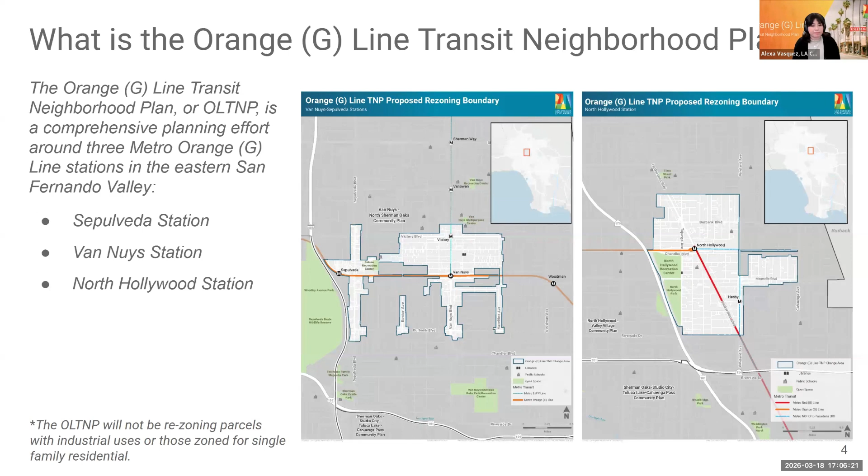The vision statement of the plan is to create thriving mixed-use districts that encourage sustainable living with multiple housing options and connections to neighborhood amenities and services.

Based on community feedback and topics that emerged during outreach efforts, the plan's goals include providing housing for all incomes, encouraging more community-serving businesses and amenities, promoting a variety of mobility options, implementing standards that support a safe public realm, and supporting healthy and sustainable neighborhoods.

The OLTNP will consist of the following project deliverables: updated land use maps around the Sepulveda, Van Nuys, and North Hollywood stations; updated zoning around these stations applying the city's new zoning code; mobility updates consisting of amendments to the city's mobility plan 2035 within the OLTNP plan area, including modifications to enhance transportation networks and street designations; and environmental review of the project in the form of an addendum to the city's housing element EIR, as the OLTNP serves to implement the housing element's housing production goals.

As of this public hearing, the project has now officially moved into the adopt phase, the final phase of the project. Following this, the plan will be reviewed by the City Planning Commission before moving on to City Council for adoption.

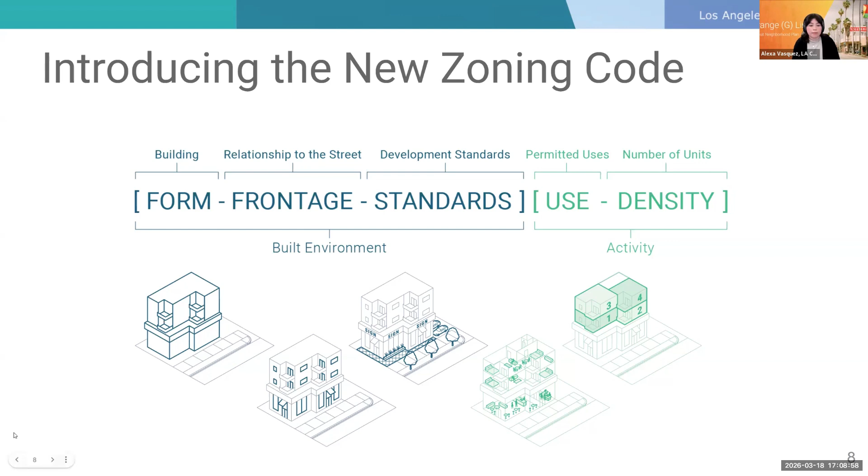Before we start our review of the proposed land use and zoning strategy for the OLTNP, we're going to provide a quick overview of the Citywide Housing Incentive Program, or CHIP, which has influenced the zoning strategy of the plan.

State law requires the city to update its housing element every 8 years and demonstrate sufficient zoned capacity for housing to accommodate the required number of units identified in the Regional Housing Needs Assessment, also known as RHNA. RHNA is a California state-required process that seeks to ensure cities and counties plan for enough housing to be built for Californians of all income levels.

In order to facilitate the construction of the required number of new housing units, the city adopted the Citywide Housing Incentive Program. The CHIP ordinance consists of 3 larger programs, each aimed at creating more housing. Of these programs, the Mixed Income Incentive Program, also known as MIP, has had the largest impact on the OLTNP zoning strategy.

MIP is comprised of 3 individual programs of the Citywide Housing Incentive Program, which was adopted in February 2025 and is active across the city. That also includes the OLTNP area.

The Opportunity Corridor Incentive Area Program incentivizes increased missing middle housing on major streets near public transit and higher opportunity areas. The Opportunity Corridor Transition Incentive Area promotes lower scale multifamily housing adjacent to major corridors in higher opportunity areas. And the Transit-Oriented Incentive Area Program updates and extends the city's Transit-Oriented Communities Program, which creates density bonuses and development incentives for areas well served by transit, regardless of their opportunity area.

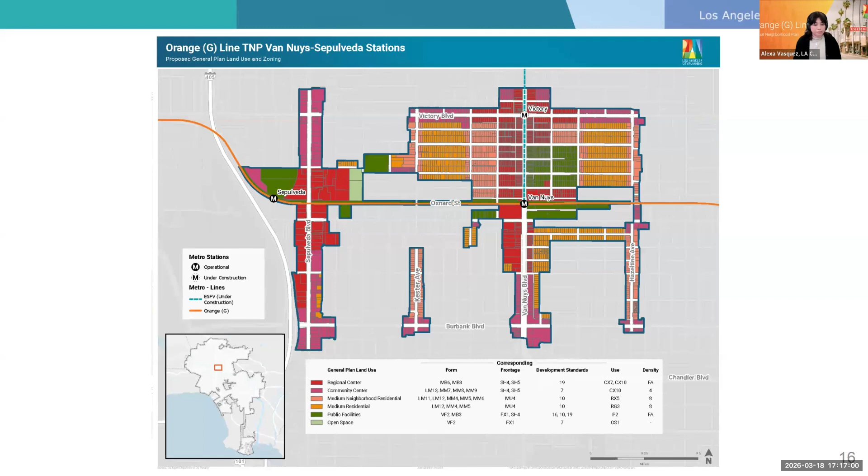For a comprehensive list of zoning and land use updates, please refer to the OLTNP interactive zoning map available on the project website at planning.lacity.gov/OLTNP. And I'll hand it off to Alex Linz for the next portion of the presentation.

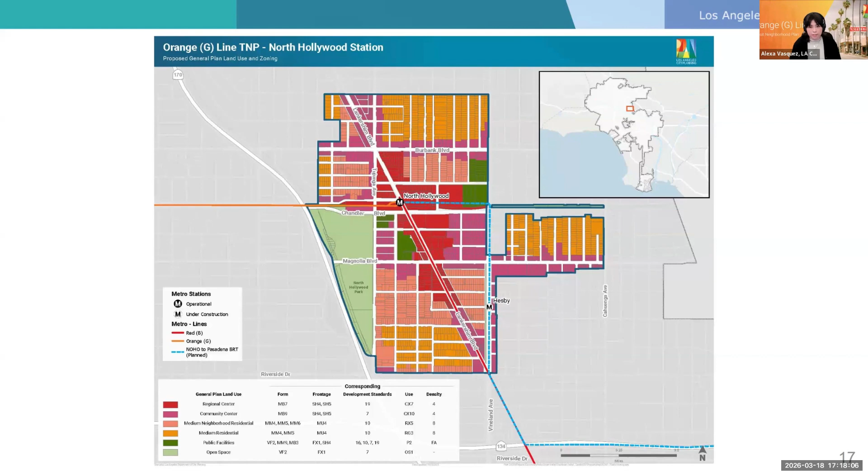In addition to updating the zoning in the plan area to encourage transit-accessible and mixed-use development, the OLTNP includes features that seek to respond to goals and objectives shared by the community during the outreach phase of the project. The plan encourages the production of affordable housing through an incentive system that permits additional development rights in the form of higher floor area ratio and building height in exchange for providing a mix of residential units at different levels of affordability. The amount of bonus FAR and height is set by the form district in each property's zoning. The plan proposes to set base levels of development intentionally low in order to incentivize developers to include affordable housing in future developments.

The OLTNP allows for another level of development incentives to be unlocked in exchange for the provision of additional community benefits beyond affordable housing. These are referred to as Level 2 community benefits. Developments looking to utilize Level 2 incentives must first max out incentives offered through Level 1, or the provision of affordable housing, before being able to utilize the additional FAR offered by the Level 2 incentive. In the following two slides, we will highlight two Level 2 community benefits that developers may choose to provide in exchange for additional development incentives.

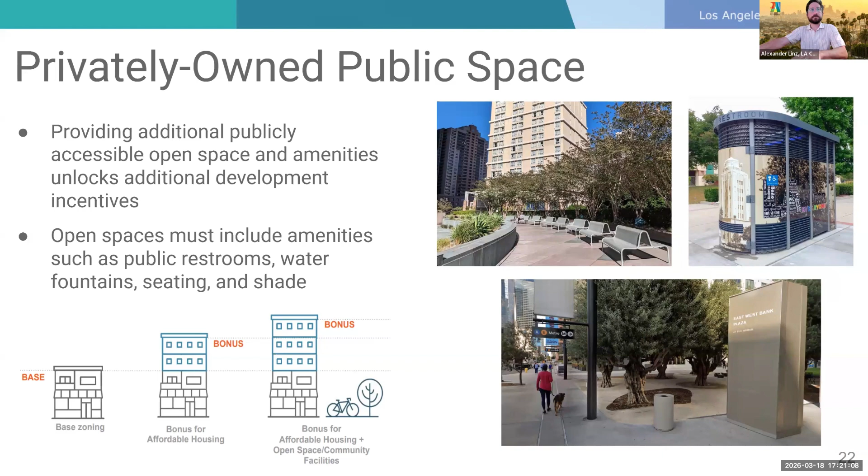Community feedback and Department of City Planning analysis also indicated the need for increased shade along many important corridors throughout the OLTNP area. In response, the plan is introducing a new frontage district called Shopfront 5 that is aimed at producing more shade from new buildings.

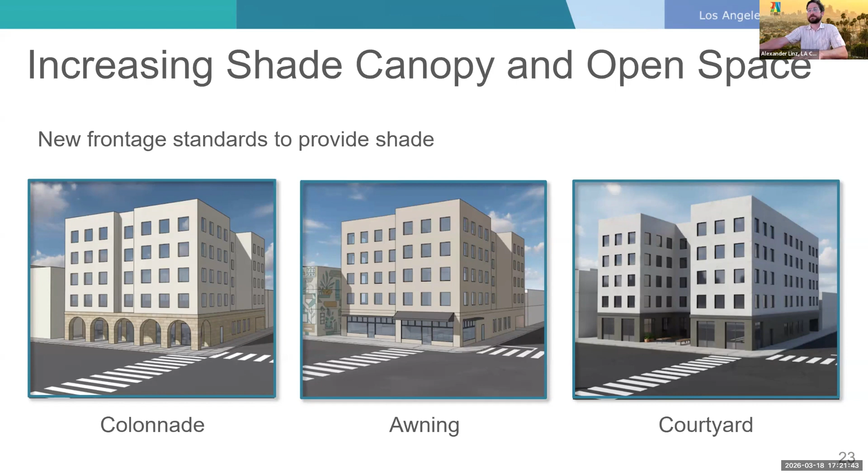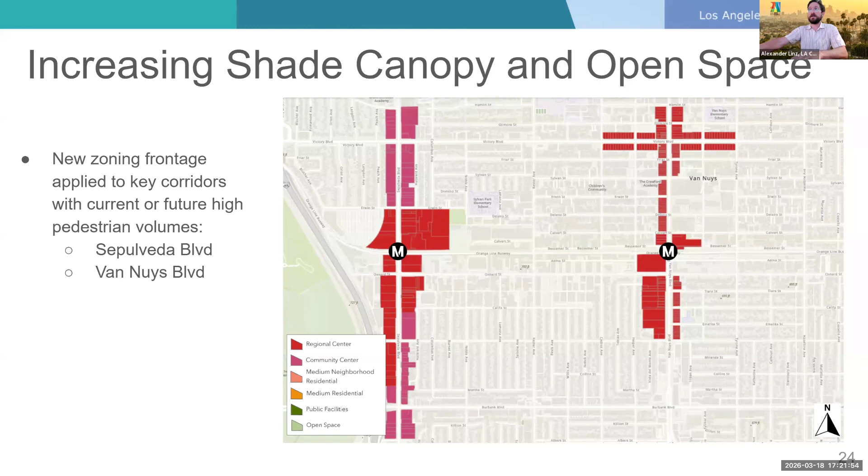Within the Van Nuys and Sepulveda station area, this frontage district is applied on portions of Sepulveda, Victory, and Van Nuys boulevards. In the North Hollywood station area, this frontage is applied on portions of Lankershim, Tujunga, Burbank, Chandler, and Magnolia boulevards.

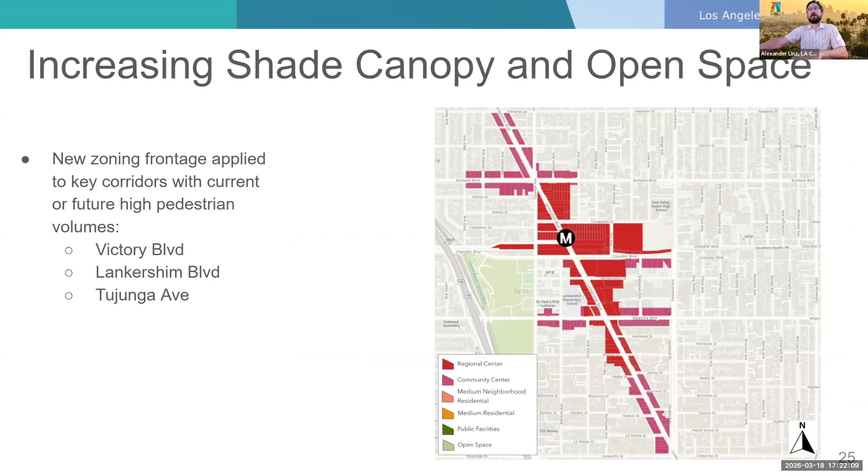Finally, we will highlight a zoning tool that is meant to ensure new buildings contribute to a safer and more vibrant public realm. This tool is called a special lot line, which is strategically applied around all three station areas and requires building facades that face these special lot lines to feature windows and doors, entry features, landscaping, and more.

They are applied to some select alleys with high pedestrian activity and portions of the Orange Line bicycle path where appropriate. Special lot lines are intended to better activate spaces where pedestrians and cyclists already are, and to create a better experience and more visibility for users of these spaces.

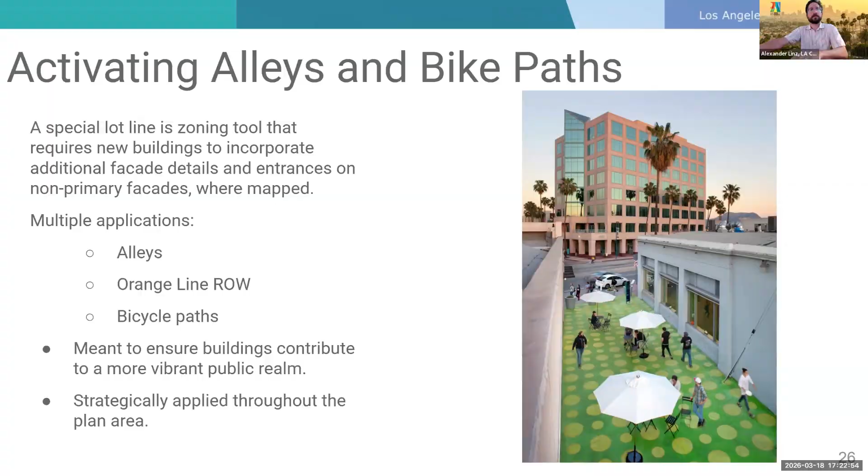We will now provide a brief overview of the updates to the city's mobility element, which are included as part of the Transit Neighborhood Plan.

The city's Mobility Plan 2035, an element of the city's general plan, outlines a comprehensive vision and policy foundation for the city's transportation system that balances the needs of all users and mobility goals. The mobility plan does not authorize or implement any roadway or transit projects, but rather establishes a vision and parameters for future implementation. The OLTNP team has evaluated and proposed updates to current street designations and enhanced transportation networks that are assigned by the city's mobility plan within the plan area.

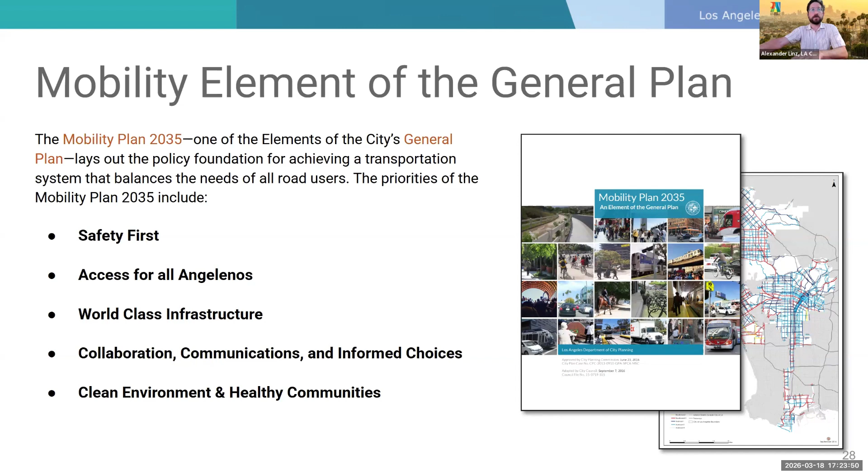The full list of mobility element updates is available on the project website for public review.

The city's circulation system maps establish designated street classifications for every street in the city. These street designations are used to define the different types of streets and establish standard dimensions for each type of designation. These designations establish the total amount of right-of-way that is to be used for sidewalks, travel lanes, medians, and other roadway features that might exist.

The OLTNP is proposing to apply new street designations to a limited number of streets in the plan area in an effort to increase sidewalk widths, respond to existing and planned infrastructure projects, and to maximize safety for all users.

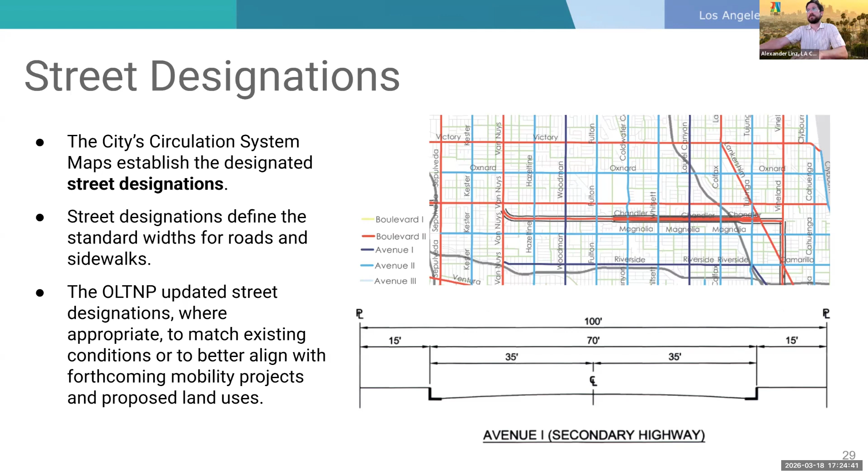The Mobility Plan 2035 includes enhanced network maps, which identify priorities for different modes of mobility, such as walking, cycling, and transit on streets throughout the city. The enhanced networks shown on these maps identify which streets might best serve the needs of different non-auto users, and each enhanced network contains a set of improvements that should be made to optimize that mode of transportation.

For example, streets included on the Bicycle Enhanced Network are targeted for enhanced bike infrastructure, including protected bike lanes, while streets on the Pedestrian Enhanced District map are eligible to receive improvements aimed at improving pedestrian safety and comfort, such as signalized crossings, curb bulb outs, and wayfinding signage.

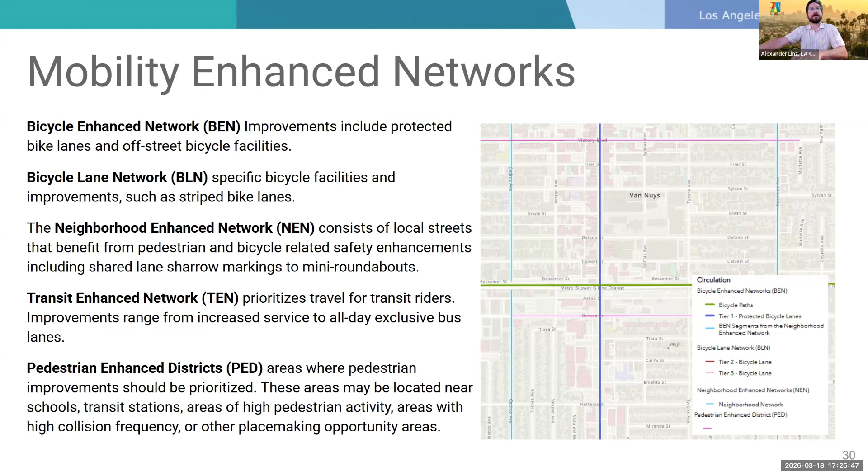As with street designations, community and transit neighborhood plans present opportunities to update enhanced networks within the plan area. The OLTNP has proposed several such changes to the enhanced networks found within the plan's boundaries.

We will now review the proposed legislative actions, which will be reviewed by the City Planning Commission in order to effectuate the plans and policies proposed by the OLTNP.

The proposed actions are: update the general plan land use and zoning maps around each of the 3 stations, Sepulveda, Van Nuys, and North Hollywood.

Repeal the NoHo Commercial and Artcraft District overlay and the portion of the Van Nuys Central Business District Community Design overlay within the OLTNP boundaries.

Consider new proposed community benefits for implementation in the OLTNP.

Reclassify select street designations and update enhanced networks in the Mobility Plan 2035.

In order to fulfill the requirements of the California Environmental Quality Act, or CEQA, the OLTNP will utilize an addendum to the city's Housing Element Environmental Impact Report, or EIR, to serve as the environmental review for the project, as the OLTNP is a work program which implements the city's required housing element.

The OLTNP will also use the statutory exemption that CEQA does not apply to active transportation plans developed by a local jurisdiction, as well as Class 1 and Class 4 categorical exemptions to serve as the environmental review for the mobility updates component of the project.